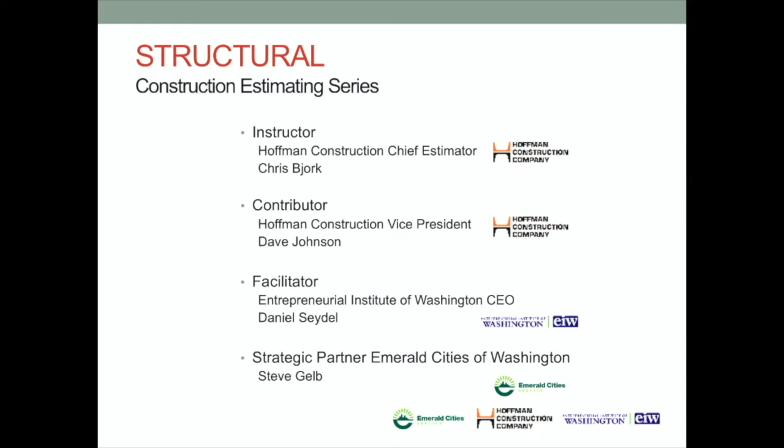Today we're going to hear from our speakers, as you can see. Our primary instructor today is going to be this handsome gentleman to my right, Chris, and he will be delivering the presentation today.

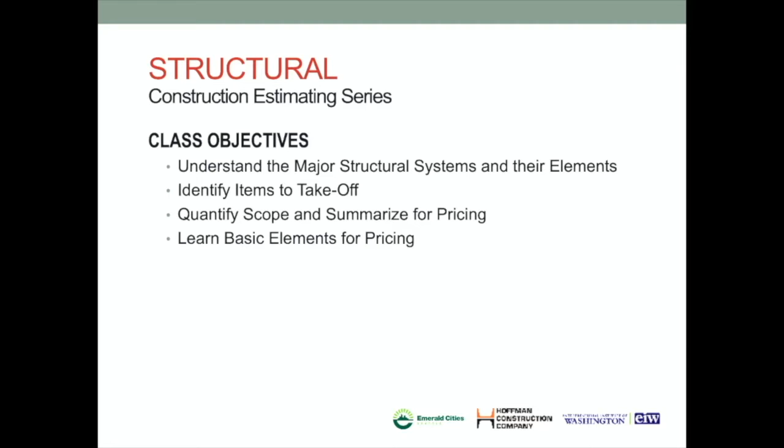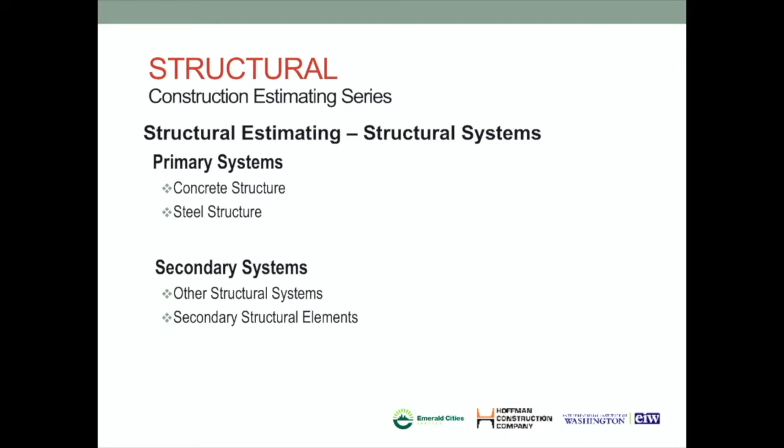We're going to start off with the structural systems. We're going to talk about the primary, concrete and steel, and then we'll talk a little bit about some of the secondary structures, so other structural systems that they have, and then some of the systems that are more miscellaneous and deal with some of the minutia about structural estimating that are the little parts and pieces that go into looking at a broader scope like miscellaneous metals.

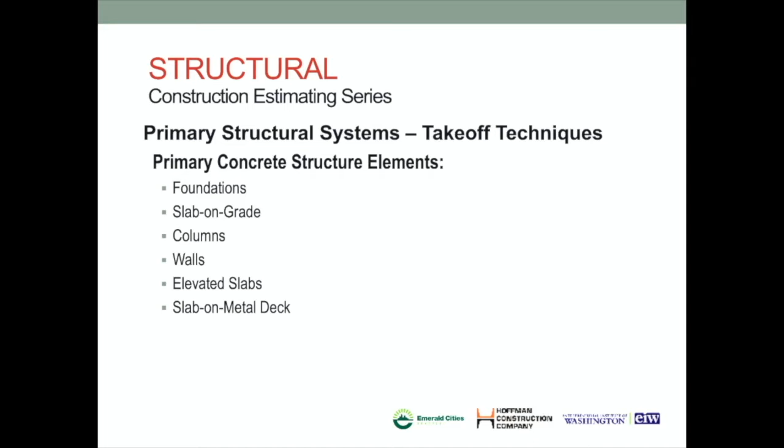Let's start off with concrete. So concrete, you can really boil down to your major elements of concrete construction into foundations: the footings, mat foundations, pile caps, things that are in the ground that support the column loads. Slab on grade, that base slab, columns, walls, and there's a number of different types of walls depending on what their function is. Elevated slabs, and then slab on metal deck, which is a type of elevated slab that you use in steel construction with a metal deck that you fill with concrete.

Focusing first in on the concrete foundations. We have different types of footing. A spread footing is an isolated footing that takes one column load. A wall footing will take a wall load, also called a continuous footing.

A mat foundation or mat footing is really a large spread footing that you'll typically see under an elevator core or elevator pit. It takes a much larger area and might have several shear walls on top of it, so it's taking a much larger load and is typically deeper, so it spreads that load into the ground more effectively.

The things we need to think about when we look at concrete foundations: we need to think about forming. When you're dealing with concrete, you need to understand your formwork, that's what we build to make sure the concrete stays in. You also need to know your volumes of concrete.

Then you need to look at some of the details. In concrete, oftentimes you're going to have a shear key. In a retaining wall, there's a little key that sticks down below the bottom of the footing that may need to be hand excavated out. Most of the time on a footing, your excavator will go out and dig the footings out, but some of these smaller things, you may actually have to have a worker out there with a shovel.

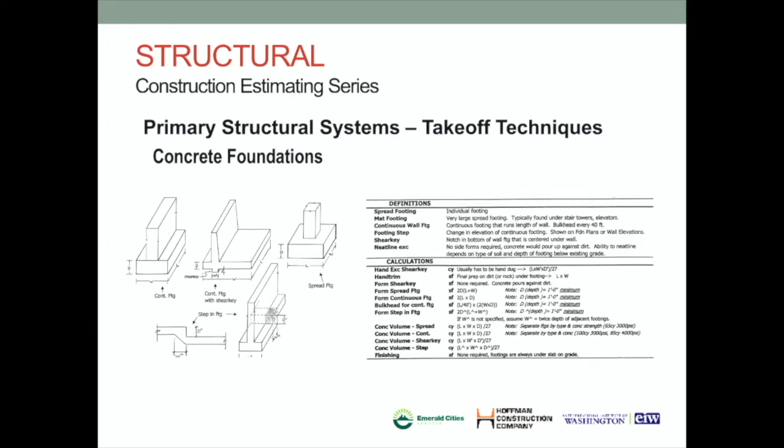Concrete typically gets finished, and for footings you'll strike them off, but you don't include finishing when you estimate footings because they're buried—you're not going to have a really finished surface. The one exception is on some mat foundations. Some mat foundations are actually mat slabs, and they will have a finished surface on top because of the nature of how the structure is designed. But that's the exception, not the rule. So you need to look at your details on your plans, and that will tell you whether the mat foundation is the finished surface, or if they put a topping slab or a slab on grade on top of it.

Slabs on grade—this is the lowest level, and you can have differing thicknesses. You can have a traditional non-structural slab on grade, which would be 4 to 6 inches thick, or you can have a structural slab on grade. The difference between the two is a structural slab on grade is designed so that if the ground below it sloughs off, it can support itself as an elevated slab.

Wherever you have bad soil conditions, say around University Village, which is a former peat bog, you need pile supported structures. Because of that, you may pour that slab on grade on the ground, but over time the weight of the structure is going to cause the ground below it to drop, and if you go in there a few years later there'll be a gap between the bottom of the slab and where the ground is. The big difference really is in the thickness and the rebar, but as far as construction goes and how you estimate it, it's exactly the same because it's a slab cast against the ground.

Starting with how you need to look at this, you need to look at your fine grading. So just like footings, you need to make sure that the subgrade is in the right shape to make sure that you have the right depth of concrete. You may have a thickened edge at the perimeter, so you need to make sure that you have that excavated

And that graded well. Those are the hand excavation type activities that you may have. When you get into the formwork, the things that you need to think about are edge forms. So that's all around your perimeter, and that's just your perimeter times your depth. Now, we always assume that there's at least 1 foot. So if you have an 8-inch thick slab, for forming purposes, you have a 1 foot thick slab, because the formwork, when you start getting down below 1 foot, it's going to take you the same amount of time, whether it's 4 inches or whether it's 1 foot. But once you get over 1 foot, you start using the actual depth. So if it's 18 inches, if you had a thickened edge form that was 2 foot, you want to make sure you use the 2 feet.

You also have construction joints. That's where you're breaking your pours. Typically, they will show you an actual drawing. They may tell you where it is, or they may tell you what the limits are in the specifications. You'd like to have those between 5,000 and 8,000 square feet of surface, because that's about what you can finish in one pour in a reasonable amount of time.

Part that goes along with the construction joints are column blockouts. Column blockouts around a steel column or a concrete column, we'll put a diamond pattern around there, and that's really to make sure that that concrete stays intact and doesn't adhere to the column itself. And then as that column moves up and down, as it takes load, it doesn't cause the slab to crack. So you create a separate pour break there. You'll often put some expansion joint around it, and then you will take off that concrete involved with it later, because it's a separate activity. Once the rest of the structure is done, you'll come back and fill those with concrete and finish them off.

One other thing I recall, I see that I forgot one thing. Underneath the slab, oftentimes you will have a vapor barrier, and oftentimes that's the concrete subcontractor who's in charge of putting it down. When you look at the vapor barrier, you need to remember things like the actual area of it. You need to include something for laps and for your waste factor for the vapor barrier to make sure that you quantify it correctly.

But you have the other types of joints that you have are saw cutting control joints, and those are there to prevent cracking. You may have some formwork for slab depressions where you have stone tile and you need to lower it 2 inches to make sure that you have enough depth and the flooring flushes out nice and even once you get into your finish work.

When you get into the finishing types of quantities, it's areas, so square foot of finish area, but that needs to include a number of different activities. So setting your screeds, which makes sure that when you're pouring the concrete that you get the right depth of concrete. Finishing your area, the finish area, and you need to understand what types of finish you have.

You could have a trowel finish. You may have a float finish. You may have a broom finish. You may have an exposed aggregate finish. Those are all different types of labor that goes into it, different types of material costs that you need to think about.

And finally, you need to cure the slab. So that can involve either a water cure, where you spray water over it over a certain amount of time, or a chemical cure, where you actually spray a chemical compound on top of the slab once it's been finished, so that the slab cures and you don't experience a lot of cracking, surface cracking on it.

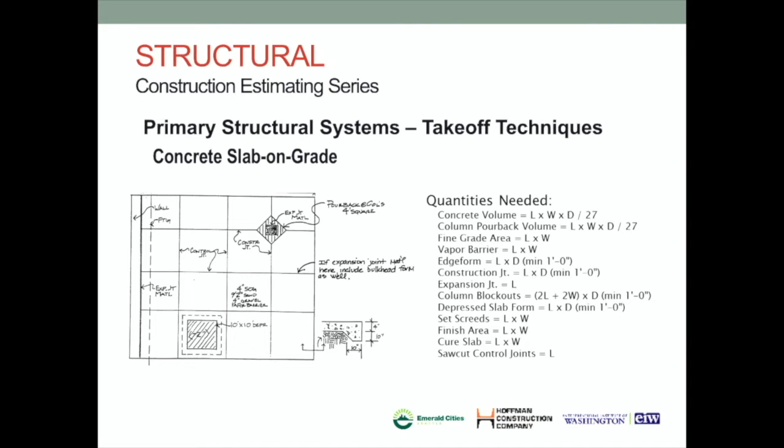Next, concrete columns. So a concrete column can be round, it can be square, or it can be rectangular.

Formwork, again, you need to separate out round columns versus square or rectangular columns, because they're two different forming systems. A round column can be as simple as a piece of sonotube, but if you've got a lot of round columns, they have concrete metal forming systems that clasp together that can make you much more efficient as you pour a lot of concrete and set up the forming for those columns.

Sometimes columns have capitals on them, and a column capital is this enlarged area at the top. If you have column capitals on your project, you need to take those off separately, because that is not going to be included in your main column formwork. It's going to be a separate type of form you have to build, so there's a different labor and productivity rate, and different material cost associated with that.

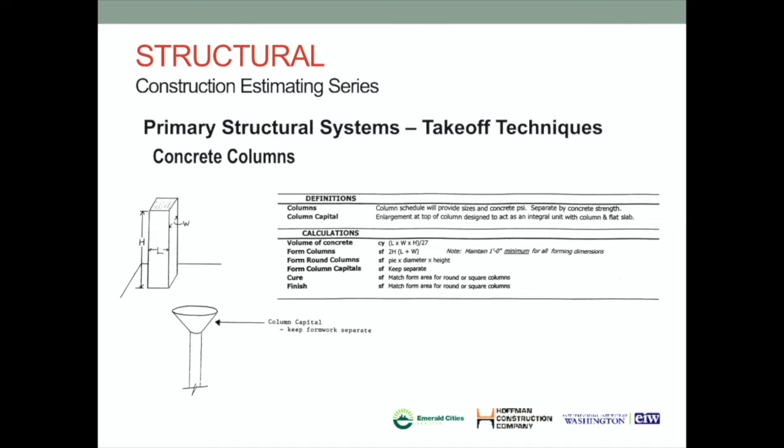Again, you take off your volumes for your concrete, and make sure to always divide by 27. It's a common mistake that I see, making sure you get that to cubic yards. And then, like most, you need to cure and finish.

Finishes for vertical formed surfaces can include a point and patch, meaning you go in and patch any holes, or knock off any big fins left over on the concrete. You could have a sacked finish, meaning you're actually going to rub it down - it's a more architectural finish. You could have a skim coat finish, where you take slurry and skim coat the columns for a really nice, smooth architectural finish. And sometimes you may have an as-cast finish, which is a form of architectural finish.

For an as-cast finish, you're going to use a higher level of formwork, because it'll be an architectural grade form, which costs a little bit more. You're going to make sure the joints are more caulked and tight, so that when you strip the forms off, it creates a nice surface. Part of what architects like about an as-cast form is that they actually want to see some of those imperfections of the concrete - they're highlighting the nature of that material architecturally. It can go very well with an exposed wood structure to see that structural integrity of everything.

Concrete walls - getting into the vertical elements here. There are a number of types of concrete walls. You can have foundation walls, which are below the ground - typically one side is going to be cast against earth. You can have structural or shear walls. A shear wall is going to take the lateral load of the building, the earthquake loads, wind loads. Structural walls may take the gravity loads as well.

One thing to note: when you do your general formwork on both sides of the wall, if you have small openings, you don't take out any formwork for those openings. You form the full wall as if the opening wasn't there, then nail your bucks to that wall form, button it up with the other side of the form, and cast your concrete around it. So you don't take out any wall formwork for the openings, unless you have a huge wall that you're actually breaking up into smaller pours.

Then you need to plan your work accordingly and put the forms where you need the formwork. You may also have brick ledgers.

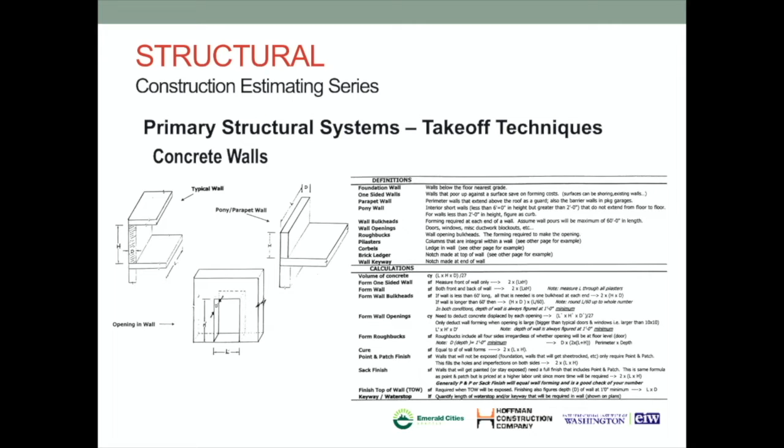On a foundation wall, a brick ledger is just a notch out of the form, looks like an L, that the brick will come down and sit and bear upon, and the wall will shrink down in size. It may go from an 18-inch wall to a 12-inch wall, and you need to quantify that with a lineal footage. Pilasters are also often in walls, and pilasters are columns that are integral into the wall.

You need to add the extra formwork to form out those pilasters to make sure you account for that. Similar to columns, you have different types of finishes: point and patch, sack.

You might have a sandblasting finish, which is in addition to a point and patch finish. You'll go in, point and patch it to get all the major fins and big bug holes smooth, but then you go in and sandblast it to get that nice sandblast finish. There are different ranges of sandblast, so you need to look at what the specs say—you can get anywhere from a light sandblast to a heavy sandblast.

Elevated slabs. This would include any formed elevated slab: a conventional flat slab, a post-tension concrete deck. It would also include some more specialty type slabs, like a waffle slab or a pan joist system.

The main thing to think of here is you start off with your shoring. Your shoring and your soffit form are one activity—that's the bottom. Think of it as you're making a nice dance floor to build this slab on. You run that formwork through openings, but you're not going to worry about those openings when you take off and quantify this.

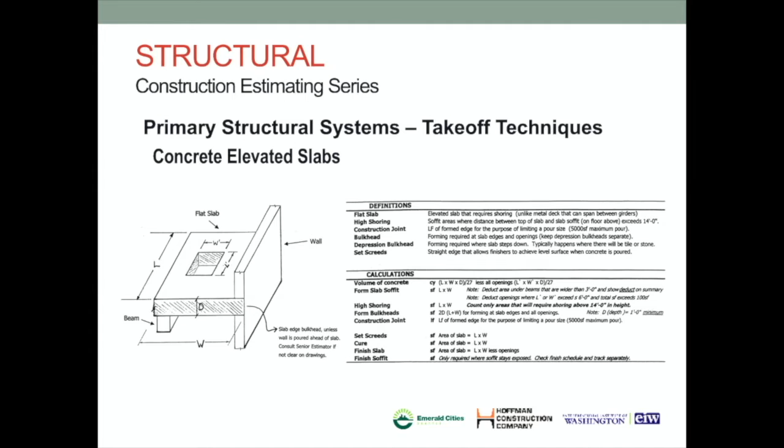Finishing, just like slabs on grade, setting your screeds, the type of finish - trowel, float, broom. But the other thing you need to remember is that you may need to finish the soffit form too, and that's a dry finish, just like a wall. You need to look at your specs and make sure you understand what it is.

Sometimes you'll have to finish it, sometimes you won't. If it's completely covered up, they may not have you finish it. If it's a parking slab, they may just have you go down and grind off the big fins that are at your form joints. If it's an architectural finish, they may want you to grind it down and patch and make sure it looks nice and smooth.

And the last major concrete element is a concrete slab on metal deck. Here you have a corrugated slab, metal decking that you'll pour the concrete on.

The things about concrete slabs on metal deck that you need to be aware of is, first, you need to make sure you use the right depth. The way you'll get this denoted is 2 inches of concrete over a 3-inch deck. The common mistakes here are you put 2 inches of concrete in it and forget about the 3-inch deck, and in those flutes you've got 3 inches of concrete. Or you say, oh, I've got 2 inches over 3 inches, so I have a 5-inch deck. Well, that's not right either, because they're flutes and there's gaps in them.

So then you would have too much concrete. You need to take the average depth. So if you have a 2-inch concrete over a 3-inch deck, you're going to have an average of 3.5 inches thick. You need to take the average of the 2 inches and the 5 inches, and that gets you the 3.5 inches.

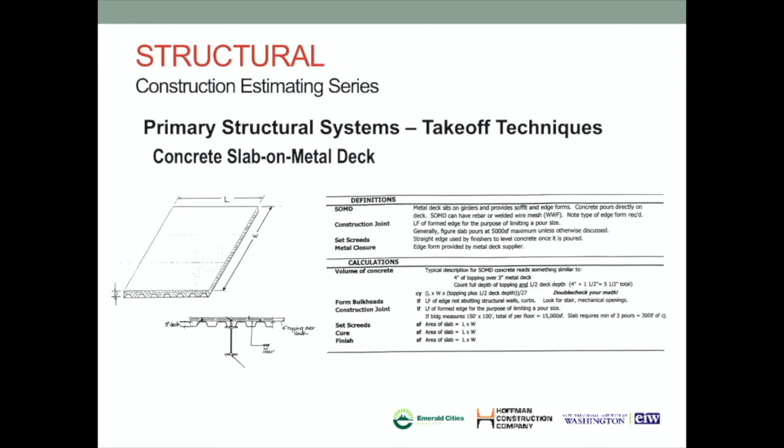The last key piece of looking at slab on metal decks is looking at both the edge condition and the beam spacing. If this overhang past the beam is far enough, you may have to shore that edge or kick it back to the beam, because with the wet concrete load, which is heavier than when the concrete's set, it may cause that to deflect, and you don't want your slab to dip at the end - you want it to maintain that nice flat integrity.

That is usually the shoring on slab edges. I've seen it usually called out, but it's not always called out, so you may have to ask a question about that.

I bring up the beam spacing because just like that situation with the wet concrete load, you may have to shore a metal slab system for when you pour the concrete. The structural engineer will not tell you this. The structural engineer is responsible for the integrity of the slab in its finished state, when the concrete is set. Structural engineers typically are not responsible for concrete activities, like what happens when you place the concrete.

So you need to understand the beam spacing, and that may involve asking a question to the structural engineer, or asking the deck manufacturer. The deck manufacturer will be able to tell you if you've got this kind of spacing and this kind of load, you need to shore. If you're over a 10-foot spacing and you've got 4 inches of concrete over 3 inches of decking, yeah, you need to shore that while you're placing your concrete.

The issue that comes in is the decking and concrete slab are fine for deflection at that beam spacing in the final condition, but not when you have the wet concrete loads. So you need to understand what that wet concrete load is, in conjunction with the beam spacing, to know whether you need to shore the metal deck or not.

There was another question as well: what is the lifespan of these different concrete structures? Well, that depends. Concrete structures can last 100+ years, and there are concrete structures here that are well over that.

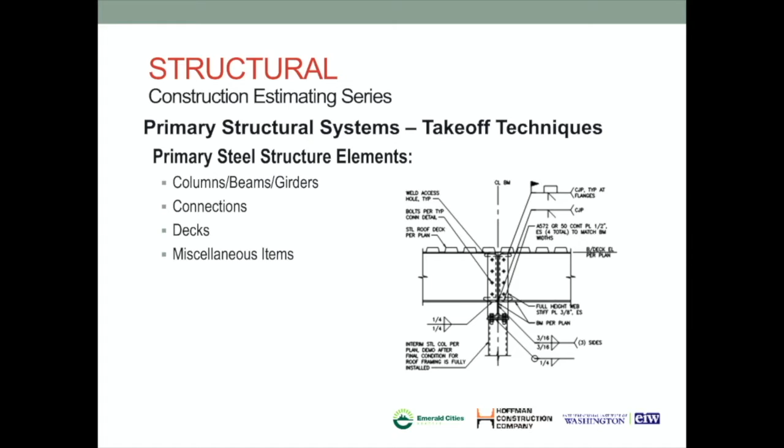You need to think about your connections, and then you'll have a metal deck, which we just talked about with slab on metal deck, but the steel subcontractor does the metal decking. So we'll talk about the decks here, and then there are some miscellaneous items that we'll talk about.

Starting off with your columns, beams, and girders, we look at steel two ways. So the quantities you need to take off are twofold. You need to know the weight of the steel, the tonnage of the steel. You also want to know the piece count of the steel, because the piece count will factor into your erection costs, since you'll have a crane to erect this.

Erecting a 3,000 pound beam is going to take a similar time to a 1,000 pound beam, because the suspension of the beam is being done by the crane, and the difference is just how many bolts or welds you have, which may take more or less time. But you still have a similar amount of people working on that erection. So you need to know the piece count for your steel, and the weight of the steel in order to purchase the steel.

Things you need to understand on steel: you need to read the specifications and know what type of steel you are using. There are a number of different types of steel, and they range in cost. You should also note whether the steel is galvanized or stainless steel. That doesn't come up in general building construction, but if you get into a different type of building, like a treatment plant, where steel is exposed to corrosive environments, you may see galvanized steel on the project, and you need to understand what that is, where it goes, and that it's an added cost.

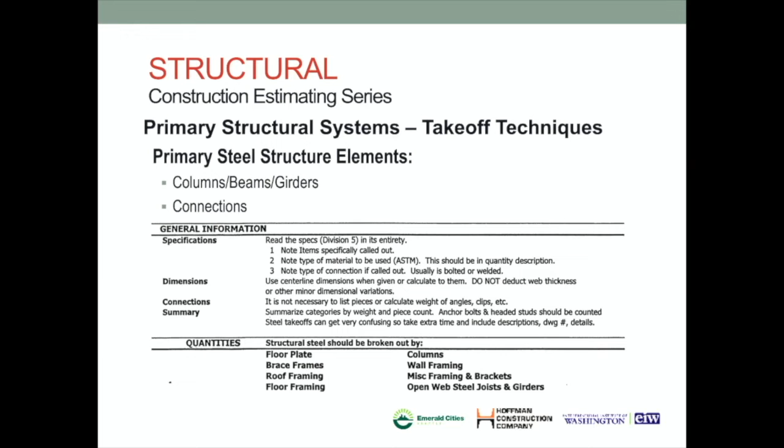And then we'll talk about the connections. Actually, for connections, you typically will not take off the actual weight of those connections, the little clips that you have. Now, if you are actually doing the fabrication yourself, if you are a steel fabricator, yes, you're going to take off every clip and everything because you need to understand what that is to fabricate it.

But if you are looking at it from the perspective of contracting this work out and understanding what the costs are for your estimate, you will not take off all the little clips and plates attached to the column for connections. You will not take off the number of bolts, and you will not necessarily take off all the welding. You will use a percentage factor for that, typically ranging anywhere from 5% up to 15%, and the difference depends on the weight of your structure.

So if you have tube steel, a hollow structural system that's 4 inches or 6 inches square, that's a lighter section. If you've got lighter sections, your connection percentage is going to be closer to 15%. But if you have large, wide flange beams on a multi-story building, those are heavier sections, and you're going to be closer to 5% at that point.

So you just need to understand what kind of structure you're dealing with and how beams are labeled. You have wide flange beams and channel sections, and those tell you what your weight per lineal foot is. A W12 by 18 means it's a 12-inch tall beam that weighs 18 pounds per lineal foot. That's the same designation you'll see for a channel section, except it'll be something like a C 6.5 by 10.5.

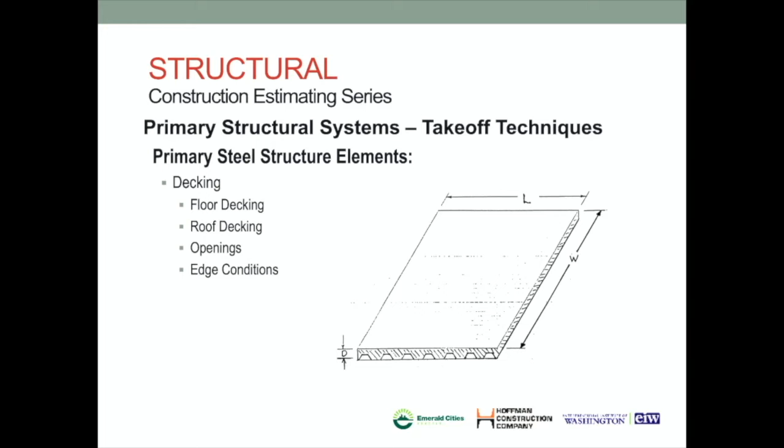Also, just like everything we talked about with the slab on metal deck, know your edge conditions. The other thing you need to understand about decking is that on floor decking, oftentimes you have Nelson studs. Those will be called out on the drawings - a stud that's shot down with a piece of machinery onto the top of the beam through the decking, providing a composite structure so the slab acts with the beam and adds more structural integrity and capacity to the full system. The plans will tell you how many structural studs you need on each beam, so you just need to be aware of that so you can add it in.

Before you go on. Sure.

Early on in the presentation, you discussed capacity on pours, 5 to 8,000, and you mentioned doing a run, lineal footage, for a break or an expansion, of 40 to 60. When a firm is competing or delivering a larger project, with multiple crews going concurrently, on a large slab, what would you do to maximize productivity? If it was over 100,000 square feet, what would be the technique to minimize the pours?

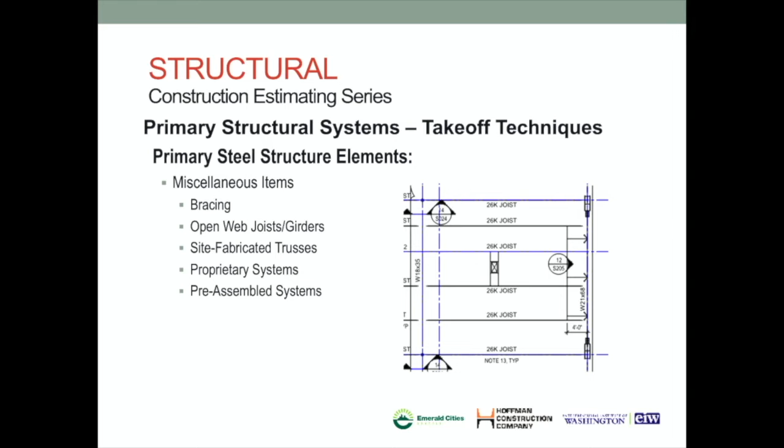You may have a site fabricated truss, which is just a truss that you bring all the pieces on and build on site. That's going to take more time, because you're basically fabricating the steel member on site as opposed to in a shop. So you just need to be aware of that.

And finally, there can be some pre-assembled systems - are you building some of this stuff off-site and bringing it in, or are you looking at a pre-manufactured metal building, which is a complete separate subcontractor that you would hire, whether it's a Butler or another manufacturer of prefabricated metal buildings. So that's the end of the primary systems.

The other systems that you can run into are masonry systems, so concrete masonry units. We'll talk more about those on the architectural side because they tend to be an architectural element as well, but they can serve as the structure.

You may have wood framing or light gauge metal framing structures - that's a conventional framing system, stick built. You may have a precast system - you see that on parking garages a lot, where you have actual precast concrete members that you purchase off-site. They're trucked in, and you crane them and attach them in place just like you do steel - very similar to steel construction, just a different material.

And then you have heavy timber construction, which can be glulam beams with glulam framing systems and decking. That can also mean cross-laminated timber or dowel laminated timber. You see that in our Founders Hall project over at University of Washington.

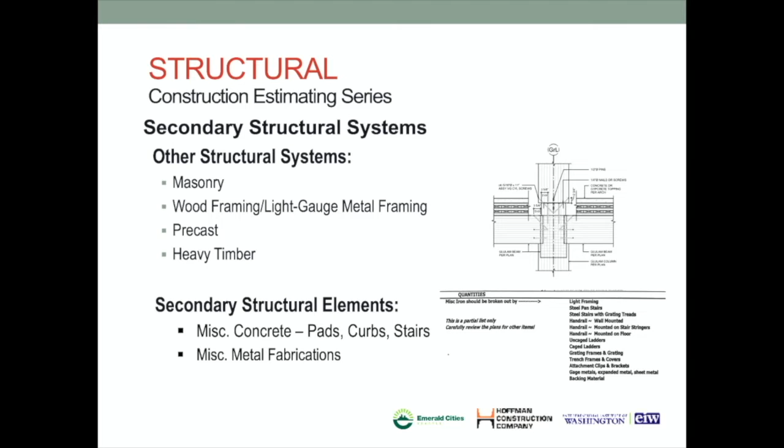Miscellaneous metal fabrications - that's everything that's steel on the project or made out of metal that is not a structural member: brick ledger angles, railings, metal stairs. That's a class in itself to figure out. From experience, you can never throw enough money as a general contractor at miscellaneous metal fabrications. No matter how much money you put in there, it will always come in more expensive because of all these little supports that come out of the woodwork. You need to go through and pore through those drawings to really understand where all these little supports are - for countertops, for toilet partitions, that may only be shown on the architectural drawings. You need to understand where those things are.

And that brings us to a sample takeoff section. So are there any questions now before I move on to the sample section?

So what we're going to do here is I've created a sample concrete and steel structure that we're going to look at: a footing, a wall, a slab on metal deck for the concrete piece, and then look at the steel beams and decking on the steel side of it.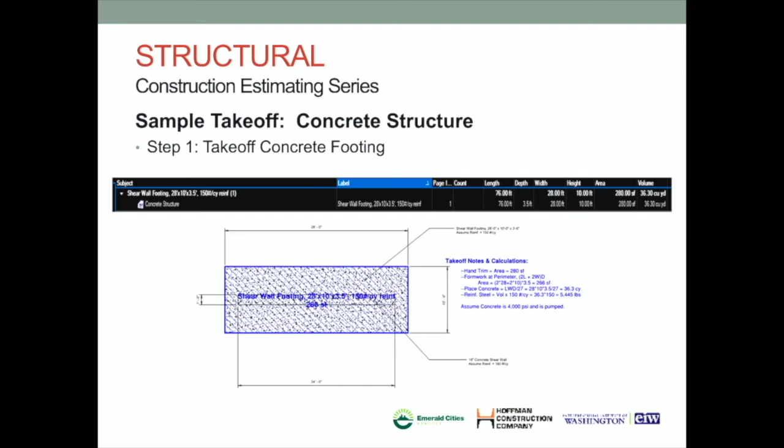For this exercise, we're going to understand that the concrete is 4,000 psi concrete. There are different strengths of concrete, and you need to understand what those are when you look at a concrete structure - this footing is 4,000 psi concrete. We're going to assume it's going to be pumped, and the reinforcing for this concrete is going to be 150 pounds per cubic yard, which times the volume is a little over 5,400 pounds.

Once we've taken off the footing, we're going to look at the wall. That wall is 15 feet high. We're going to assume that right here at the floor level, we've got a horizontal construction joint. Where you have a horizontal construction joint, you need to note the length of that, because you'll typically put a keyway in there to make sure the pour above it attaches nice and tight, maintaining the integrity of the structure going up. We're going to assume the top of that wall is 15 feet high, and we're going to finish the top of the wall.

But this concrete is going to be 6,000 psi. Walls typically have an admixture added, a chemical added to them - they typically will have a super plasticizer added. It won't be called out on the drawings, but typically you will want to put that in, because what a super plasticizer does is make the concrete more fluid. That allows you to get better consolidation around the rebar and in the forms. So as you pour your concrete down these forms, as you get down at the bottom, you're getting the concrete all the way to the forms. When you strip the forms, you don't suddenly have rock pockets or holes in the concrete.

So you take off your quantities. We'll need some wall bulkheads here, the horizontal keyway. One thing we need to note is that we've got steel beams coming into this wall, and we've got deck coming into this wall.

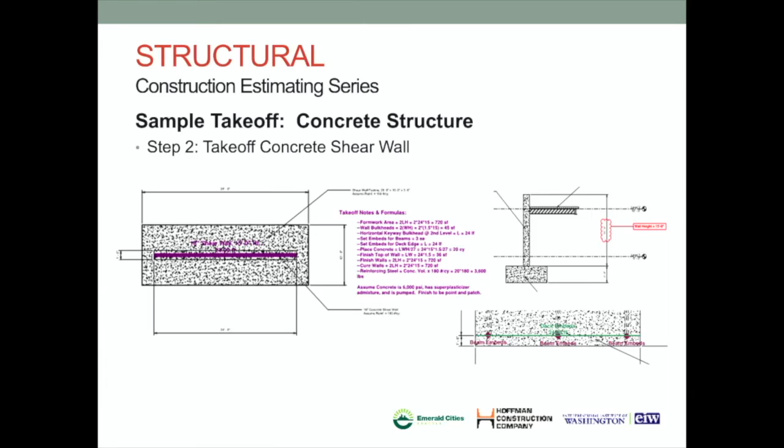Those beams are going to have an embed and a plate embedded into the concrete that we need to install. So we take off the 3 embeds for the beams, but that decking also needs an embed because the decking needs to sit on something so that connection doesn't flop and doesn't deflect. So you'll have a continuous embed down the 24 lineal feet of it that the steel sub will come back and put an angle in as part of their miscellaneous metals package.

We're going to assume, for the quantities, that this has 180 pounds per cubic yard, and it's going to have a point and patch finish. Also, this will be pumped as well.

Moving on to the last piece of the concrete takeoff is the slab on metal deck. We'll take off that area. The area is 288 square feet. We have 3 inches of concrete over 2 inches of metal deck, so that average depth is going to be 4 inches, which means the volume of the concrete is going to be 3.6 cubic yards.

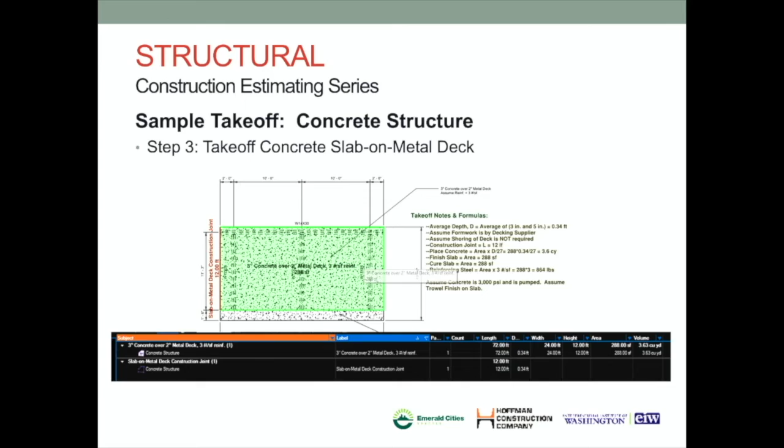We're going to assume that around the edges, that's edge metal provided by the decking manufacturer, but we've got a construction joint right here, 12 lineal feet of construction joint. We need to account for that. We're going to have a trowel finish on it. This concrete, though, is going to be 3,000 psi concrete, and it will also be pumped.

So these are things that we need to start thinking about when we get to the pricing mode of this. So if we take our quantities and put them into an estimate summary, here are the things we need to think about.

Start off with hand excavation, things like hand trim on your footings. We put those quantities in there.

Then your formwork: you've got your form footings, your forming for construction joints on your slab on metal deck, the formwork on your shear walls, and setting your embeds. These are things that carpenters do out in the field. So you'll put in those quantities.

We've tracked our production rates, what our crews can actually put in per unit of measure. That's what a productivity unit is—hours per unit. To create total man hours, we know what our wage rate is, our fully burdened wage rate, so not just the basic wage, but all the adders on top of it for taxes, fringes, and workman's comp insurance.

We'll include that to get a total labor figure. We'll look at our material pricing for the different formwork, figure out what our material pricing is, and total those off on the side. Then we'll start looking at the placement of the concrete.

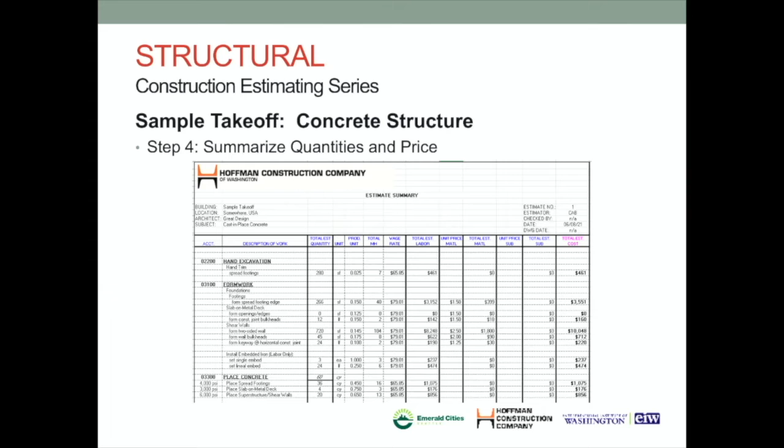Each type of concrete takes a little different productivity to place. Walls are typically a little less productive, so you have a higher productivity unit to place than, say, a footing or a slab. We're denoting what type of concrete it is on the side, whether it's 3,000, 4,000, or 6,000 psi, and that'll be important when we go to buy our concrete. So we'll need to figure out how much concrete we need to buy.

Now, when you start buying concrete, you need to understand that if you build a 3 foot by 3 foot by 3 foot box, which is exactly 1 yard of concrete, and order exactly 1 yard of concrete, you will not fill the box. You will lose some concrete in the truck, some in the chute, some in the pump, and some gets shot off the side and not into the form.

So you need to understand what kind of overage you need to factor in for your purchase of concrete, because that is our responsibility as a contractor, whether it's a subcontractor or a general contractor. If we're self-performing, that's our responsibility to figure out what that factor is.

Standard rule of thumb, if you're dealing with a lot of formed concrete, is 3 to 5%. If you're looking at footings built on types of soil like riprap that's got a lot of voids in it, I've seen concrete get up to 20%, 30% overage.

Those are where you actually have a neat cut form, so you're not actually forming it. You're just digging the earth out and casting the concrete against the earth on a riprap form where you have a lot of voids. For starters, you're going to have more. Your excavation is going to be a little bit larger than what your actual footing is, and that's just going to cause the overage to get higher. You're going to put more concrete in the ground.

So we need to understand what each type of mix that we have. Those all have different costs. A ready mix supplier is going to charge you an environmental fee because they need to deal with their cleanup. They will charge you a fuel surcharge.

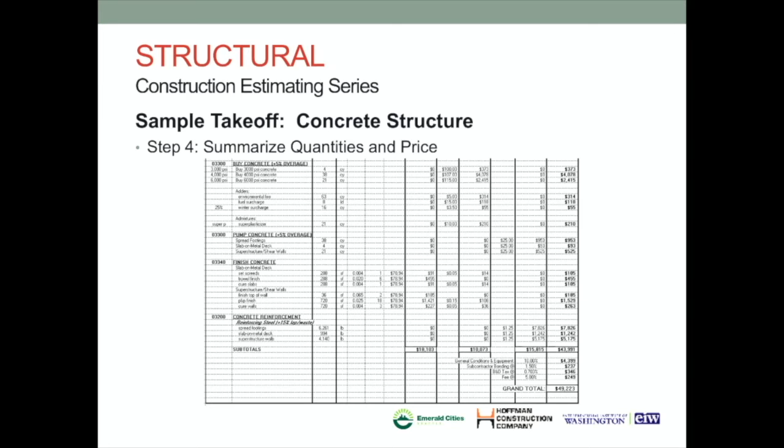Now looking at the elevation image we were looking at originally, someone would calculate the square footage, the cubic yards, and come up with a quick number. But as you can see, Chris has done a very thorough, itemized, 25-activity breakdown that itemizes every piece. You know exactly how that material is going to be finished, giving consideration to the forming material and what kind of damage it will have when you pull it off. One thing I wanted to get into quickly - obviously if concrete dried and cured really quick, you could kick ass in production. But like you say, it has to cure.

So are there some rules of thumb? Because we're talking about a footing, then a wall, and then an elevated wall on a steel structure - so we've got a few different pieces going in there. Can you give us some insight on that?

Depending on the type of element - whether it's a footing, a slab, or an elevated deck - you're going to have different requirements on how long you can wait to apply loads to those structures. A lot of times things like footings need the concrete to get up to a certain strength, not the full strength. So if it's a 4,000 PSI concrete, that means at 28 days the concrete on average has reached 4,000 pounds per square inch of strength.

Typically it's a factor of that, and that factor depends on what the engineer wants. Some engineers want a higher or lower factor, but often it gains that strength within 3 days, 7 days. For slabs, walls are a little different because you have to keep the forms on longer, to make sure you get enough integrity that when you strip the forms and braces off - or strip the forms and put the braces back on - the wall maintains structural integrity.

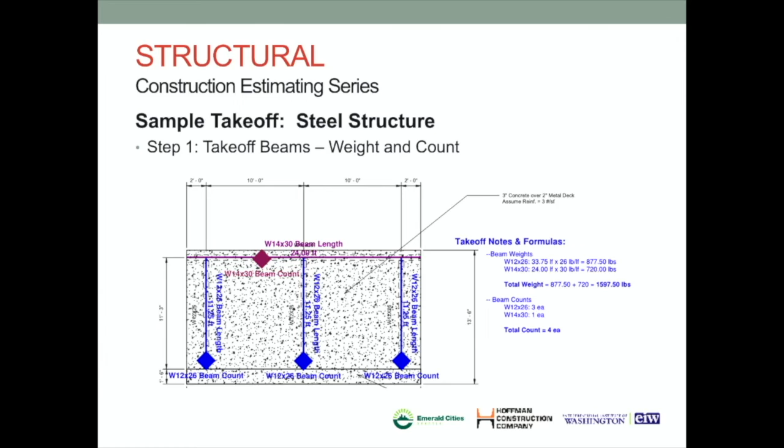So we have 3 W12 by 26 beams that are 11.25 feet long, we'll take those off. We've got a W14 by 30 beam that's 24 feet long, and we've got one of them. That's what we have for steel - that gives us a total steel weight of just shy of 1,600 pounds, and four beams total.

Looking at the steel decking, we've got 288 square feet. We've taken this off with Blue Beam, so we've just taken off the area itself. If you don't have Blue Beam, you can do length times width to get that area. There are no Nelson studs called out, so we don't have to worry about those.

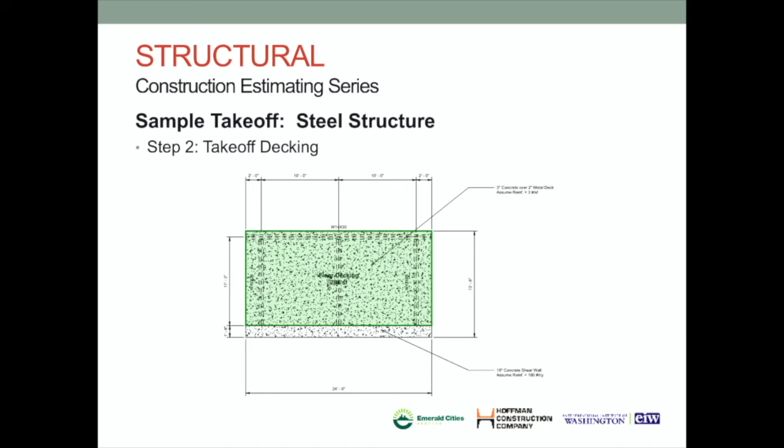And so we move on to a pricing exercise there. So we've got, look at the purchase - we're looking at the weight of the steel, 1,598 pounds. We know we don't have to figure sales tax on steel because the steel is part of the permanent structure, so it's not a consumable thing. It is taxed on the overall job as in typical construction.

We'll add 15% for the connections here because those are still pretty light members - that adds another 240 pounds. Then we'll figure $1,000 each for each beam that we're going to erect. But that's what it costs to erect them - it doesn't include the cost of the crane.

So in this project, the crane isn't provided by the general contractor. It's a small project, so the general contractor is going to have the steel subcontractor provide it. So that means we need to think about what that cost is. We think we can erect this over 3 days.

We've talked with a crane supplier who can supply an operated crane, and they tell us it's going to be $4,500 a day, all in, to move it in, move it out, and erect the crane. What those costs are, you need to talk to the crane supplier about, because that's going to really depend on what capacity of crane you need when you actually price that out. We factored in some general conditions and equipment and some markup structure, put some fee on it, and have a total there.

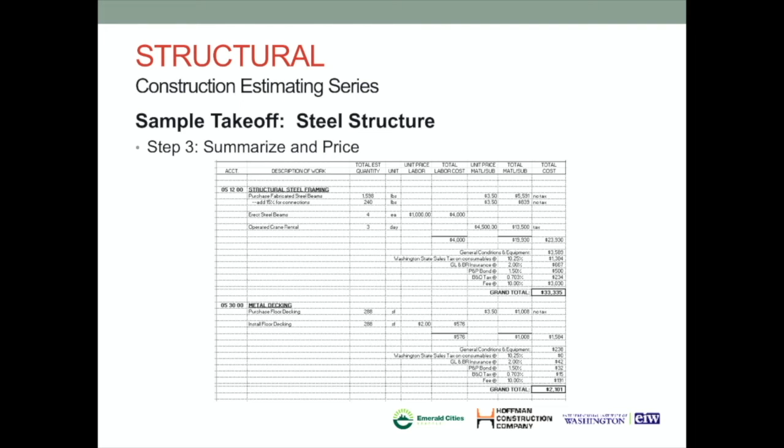And we're looking at this as if we're subcontracting the work out, not necessarily self-performing it. But we may be having 2 subcontractors do that. We may be buying the steel from one subcontractor and paying another subcontractor to erect it. We may be buying the decking from a third party that's not the steel fabricator. So there may be 3 different subcontractors involved underneath us to do this work.

And real quick, the sequencing of these 2 takeoffs would be: obviously you're installing your formwork, your steel, you pour your concrete footing, you pour your wall, and now you're in a position to be able to install the steel. And so those 3 days are after the wall's poured.

So the sequence is, if you're looking at the construction scheduling and sequencing of how that goes, you pour your footing, you pour your wall, you install your steel, then install your decking, and then you pour your concrete slab on deck. That's how it would factor into how it looks in the field when you build it.

But that's something you need to think about when you're pricing your concrete work, for instance, because with that slab on metal deck, there's going to be a gap between when the wall is poured and when the slab on metal deck gets placed. So you need to make sure your crews can move to another area of the project to stay busy, or factor in that your crew's going to have to go off-site and then come back. That's a pricing consideration you need to think about.

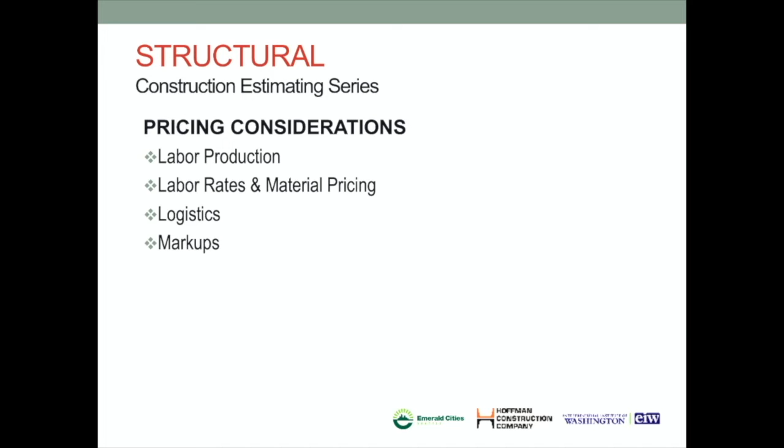So looking at labor production, where do you get those productivity units? That's kind of the big question. You can get those in trade publications. An RS Means Guide has labor productivity units. If you're coming across something you haven't seen before, the labor productivity units in an RS Means Guide is a perfectly good place to start.

I will use those sometimes if I run into something that I haven't seen before, so I need to factor in, hey, what's it really take to install this? Or maybe it's something I haven't seen before that's not actually in the RS Means Guide, but it's real similar to something that is. So I can base it off of a new type of panel, say, or it may be a certain type of formwork that looks like a wall or a corbel or some kind of unique structure, but I don't have any historical data on it. So I'll look maybe in a Means Guide to see if there's anything similar, and figure out what that productivity rate needs to be.

The best way that you can do productivity rates is track your own productivity. And if you are not tracking your own productivity out in the field, you should be, because that tells you what your actual crews can do, and you need to track them per what a reasonable unit is, because as estimators, you see all those line items, the details, and that's typically a reasonable unit.

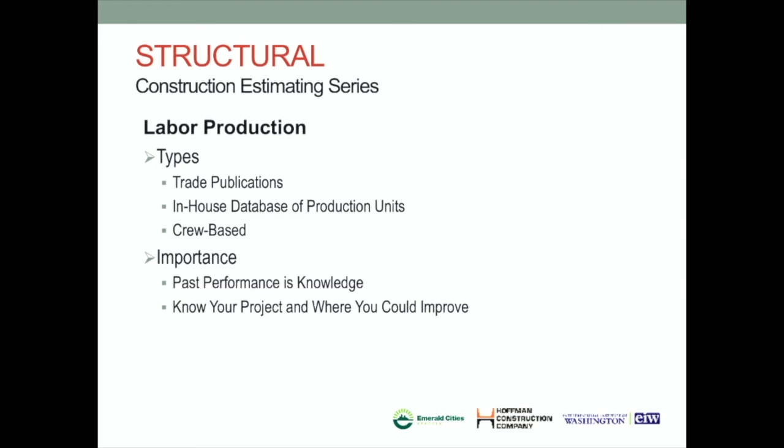Last thing about productivity rates is crew basing things. So some subcontractors, you might look at this instead of a productivity unit. You might look at having a crew unit. So I've got a crew that's made up of three carpenters and one laborer, and they're going to go out and put in X square feet of forms a day. And that's how I'm going to create that productivity unit and the wage rate. That's a perfectly acceptable way to do it. What I use that for is back checks, and it's a kind of response to talking to your superintendent.

One project we're working on, we had a third-party estimator on it, and their job is to scrutinize and question numbers because they've got a different opinion, and we're trying to work together to get them up to what the right number is. Well, they questioned our concrete numbers.

So I sat down with the superintendent and said, let's crew build this thing. We went through and figured out what crews for the whole project, created the man hours, whether that was carpenters, laborers, or finishers, and priced that all out to come up with the hours and cost for the project on the labor side, to see how that matched up with how I did it, looking at it completely differently. And they came out really close.

That was good. But that also allows you, if they don't come out really close, to see you might have a disconnect with how the superintendent sees this job running. That's important to know, because it doesn't mean the superintendent's right, or you may have a different idea that may be more efficient, and the superintendent just needs to understand that. It may mean the superintendent knows something from their experience that you don't see. So it's important to have that conversation, because then you can find real efficiencies in how you build that job in your head on paper and how you price it out.

Labor rates, well, you need to understand: are you union, are you open shop? What's your base wage versus your fringe? Unions, you can get all that information. You should be tracking what those values are and what those rates are.

Material pricing, you're talking to your subcontractors and vendors, making sure they understand what you're after and you understand what they're going to provide. That's a communication thing. So if you're getting a formwork quote from, say, a Perry Forms, you want to know how many sets of forms you need and how big those forms need to be. You need to tell them that so they can tell you how much that's going to cost for each set of form.

And you need to understand what they are including and what they aren't including, because you may need to add costs for, say, a reveal strip or a keyway, or there may be something in there that they don't have. You need to understand that before they get you the quote, because you may be getting the quote on a bid day, and you don't want to suddenly have to try to take off more quantity on bid day on the fly, when you should be concentrating on getting all that cost put together.

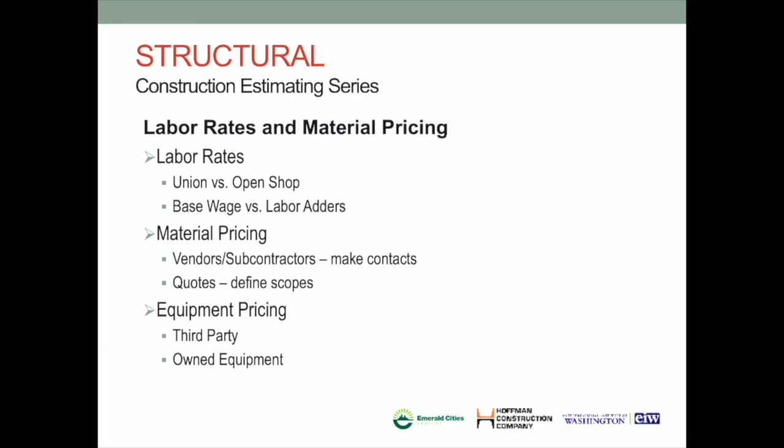And lastly, equipment pricing. Are you renting from a third party? Do you own your own equipment, or are you renting it back to yourself? Does it make sense, because the project is long enough, that instead of renting your equipment from a third party, it makes sense to buy the equipment? It may mean you pay a little bit more on that project, but now you have maintenance costs with that equipment.

But now you have your own equipment that you can rent back to yourself or not, if it's a really tight market. You have that option because you own the equipment. Does it make sense for you to have an opportunity to actually purchase equipment and create some value for your company? In that case, you'd want to make sure you're not necessarily putting all the cost of that equipment on that one project.

You write a fraction or whatever that percentage is. If you're renting equipment, maybe you'd use the value of what the rental cost would be. But you definitely don't want to put it all on one job, because you may not get it. You look at it as a business investment over several jobs, so I'm going to be able to reuse this on several jobs. I can get just what it should cost there, and then prorate that over the cost of several jobs. That's a great thing.

Logistics, this is the art of estimating. This is where you're talking about schedule considerations. When is the work happening? Is it happening now, or two years from now? You need to understand that because your wage rates are going to change, your material pricing is going to change. You need to factor that into your estimate.

Is there adequate time in the schedule? As a general contractor, we sometimes have additional constraints on the sequence of work, knowing there are areas where we'll have to double shift. You need to know where those areas are, because if there's a week and a half worth of work in a week's worth of time, you need to factor in overtime or a second shift to get it done. On a second shift with union rates, that may mean paying 8 hours worth of wages for 7.5 hours worth of work. You need to understand there's a half hour lost in productivity, and factor that into your wage rate for the scheduled overtime premium.

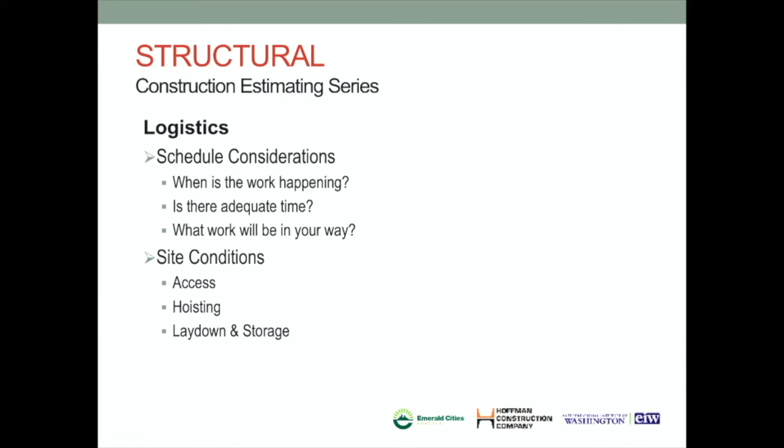And where's your laydown and storage? Will you need to store some materials off-site because it's just-in-time and there's no laydown area? Or will you have an area where you can lay down formwork?

Are you going to be able to lay down steel beams and store them there? You need to understand what those constraints are.

The last piece is markup structure, and I'm not going to dive too deep into this because markup structures is really a separate class. There's a lot to that and a lot that goes into general conditions, general requirements, and what kinds of insurance and stuff. That's a class we've talked about doing, but it's something you need to dive into.

General conditions, general requirements, that's how you're staffing the project. Are you providing hoisting? What are your safety things? Do you have a couple laborers on site that are not there to do any of the actual direct work, but are just there to help maintain your site, keep the area clean, sweep up and clean up, so that your workers doing the actual work in the field aren't having to spend time doing that, and they can be more productive.

You need to think about it. What kinds of insurance do you need? What kind of insurance is required? What insurance maybe that the general contractor may be providing for you? For instance, subcontractor default insurance, which would prevent you from possibly having to get a performance and payment bond as a subcontractor. You need to understand what those things are and what is required for the project.

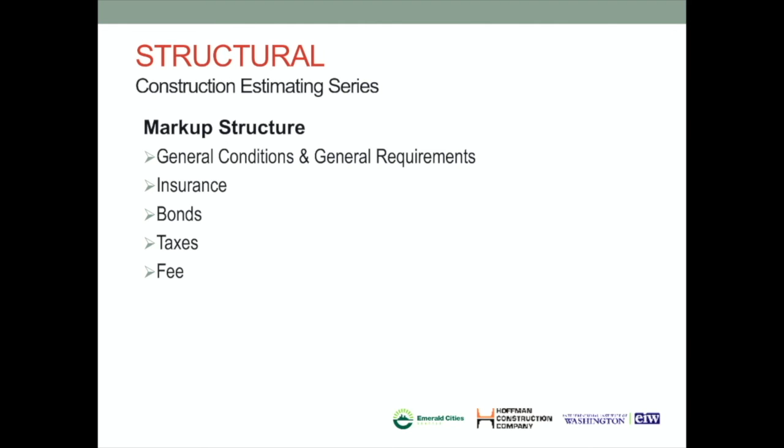And then fee - what are you willing to do the project for? What goes into the fee? Some projects may tell you to put some of your insurance or taxes in your fee. We see that a lot in our GCCM work, where our fees include things that are not just fee. You need to understand what your overhead is, what profit you expect, and what risk you're taking to do the work, because that's going to affect how much you're willing to do the work for. Those are the things you need to think about when you mark up the structures.

And that brings us to the question, if there are any additional questions.

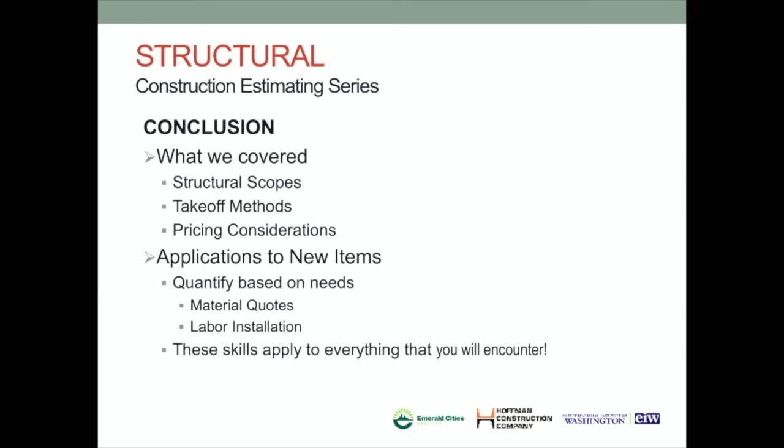I've estimated for 20 some odd years, and suddenly I get a job on my plate and in my workload that's renovating the Space Needle. You don't come across those kind of costs every day, and how you do that. It's not a job where even the historical data is really going to apply to anything beyond that job.

But using the techniques I had for how you quantify, how you look at what units you're going to have, and what your vendors are going to give you, so you understand what units you need your quantities in to get the right pricing, how to contact and get that pricing, and have the right people looking at different scopes of work and the details of the job - all of that applies. You use those same principles on something new so you can take it off and estimate something new efficiently and accurately.

It's the same principles whether it's something you know about or something you haven't known about. You just need to ask the right questions and apply those principles to the new situation.

Lastly, we're talking about future opportunities at Hoffman. These are jobs we have coming up. In pre-construction, we have the Overlook Walk project, part of the waterfront redevelopment. Basically it's a pedestrian bridge connecting Pike Place Market down to the aquarium. Really cool project - it'll make a splash on the waterfront. It'll start bidding out this fall.

We're doing a pool renovation over at the UW for the IMA building. That's a design build project, so we'll start procurement this summer going into the fall. Project S is a private developer office building project that will start bidding out late this year into early next year. These are projects we're proposing on, but as design build projects, we'll have to put a price together as part of the procurement process.

It's the King County Metro interim bus electrification design build project. King County is moving to electrified buses and they need an interim place to charge these buses. We'll be procuring that this summer into the fall. We're also doing West Point treatment plant electrical upgrades for some improvements there. We're proposing on that project and should start procuring that work for our proposal in the fall as well.

Typically when you're involved in civil and structural work, you don't have the trades on top of each other like you do in architectural, which we'll be discussing next week. But there can...